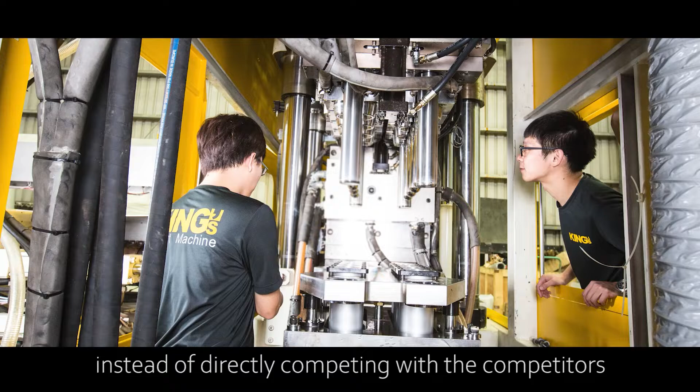From the beginning in 1983, we would face huge competition if we only made standard injection molding machines. However, instead of directly competing with the competitors, we prefer to work with our passions. Our founder, Mr. Bilsu, is a passionate engineer for machinery. He learned machinery from his professor in Germany, then worked in a Japanese company for years before he

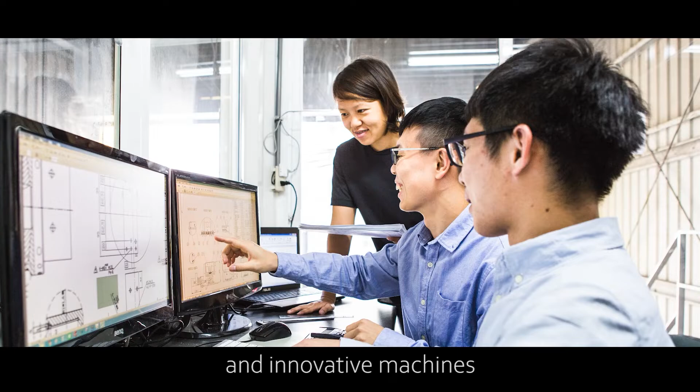set up this company. And he always encouraged our team to build customized and innovative machines to achieve the targets set by our customers. We are always excited to accept all kinds of challenges. Based on our experience over the years, we have provided successful solutions in many different applications, which continue to get us referrals to other new customers.

Regarding what you have mentioned, what are the customized machines that you have available to your customers? Oh, yeah, this is a very difficult question to answer. Actually, maybe I need to start from 1,000 sets of machines. For the past 40 years, we already developed so many different machines.

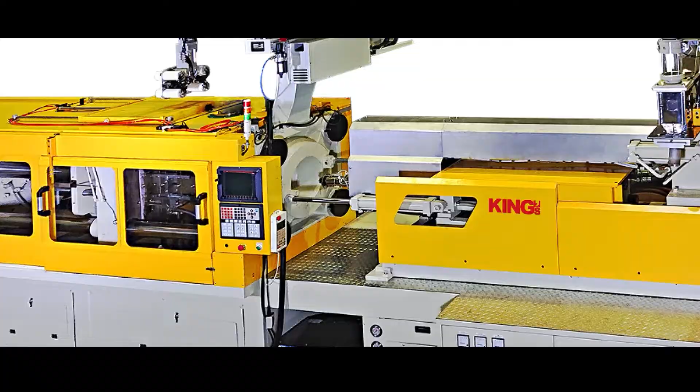However, in order to provide better service and also to meet the future trend, in 2000 we focused on 4 different series of our machines, including the vertical machine for insert molding with automation, the PET preform injection molding machine as a turnkey solution, a liquid silicone rubber machine for some special purposes, and also the low pressure molding machine, which is for the waterproof industry.

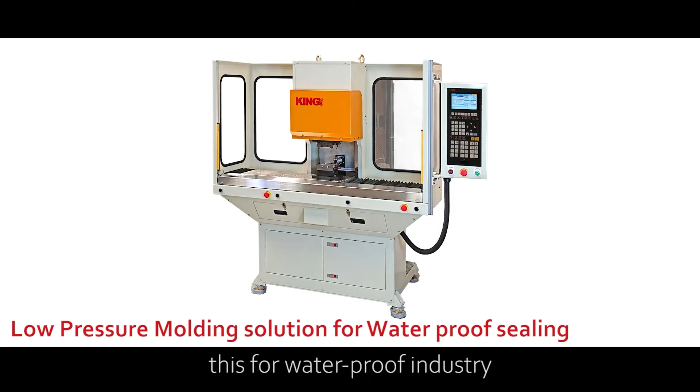So within these 40 years of expertise, what has been the biggest challenge you have had to face with a customer? And how did you make this challenge become one of your successful cases? I think staying ahead of customer needs is always the biggest challenge. You need to think ahead before customers think about it.

There is a very good experience. In 2015, we considered the huge portable drinking water consumption in developing countries. We developed the first 8-cavity 5-gallon preform molding machine. This is a very huge machine. The weight is over 22 tons. And the output is 3 times our previous model, and it saves 80% electricity.

After the hard work, we got the patent in Taiwan and China. We had a discussion with the biggest water and beverage company in the Philippines, where the electricity is twice as expensive as in Taiwan. We believed the new technology would be a green solution and contribute lean production for them.

However, the customer asked us to build a demo machine first to make 183,000 preforms for them for the trial to check the preform quality. If everything was fine, they would consider buying the next machine. So it took me only 2 days to accept the challenge, despite it being a huge investment for our company to prove the new idea.

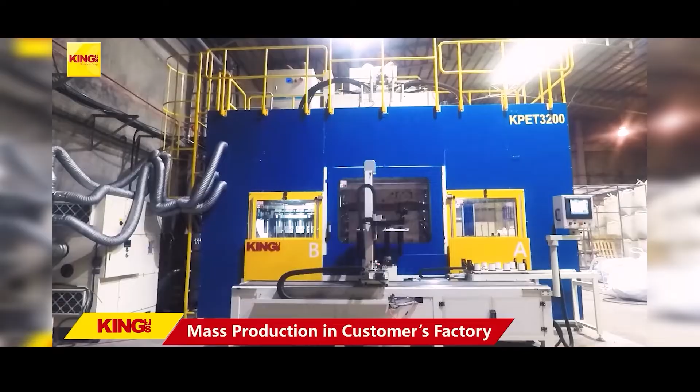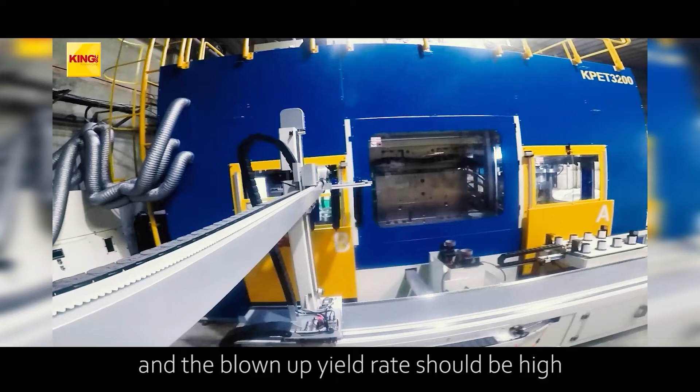Actually this preform is the biggest preform in the world for the water bottle. So it needs to be blown into a bottle. It's not the way you are looking at. A good preform has very little inner stress, and the blow-up yield rate should be very high. Our customer was buying preforms from other preform suppliers. The defective rate after blowing was about 3%. It means buying 100 preforms, they got 3 defective.

So let's see how was the performance of our preform. After 6 months of hard work, we delivered the preforms to our customer, and they were very satisfied with the result. The defective rate after blowing, how much do you guess? Maybe 0.8? Actually, it's only 0.1. Wow. Are you thirsty? Yes, I'm thirsty right now. Yeah, this is the result. That is more than 30 times improvement of the yield rate.

So the customer was very happy, and we received a purchase order for a new machine. It's been running 24 hours in our customer's factory. It saves them 80% of the power consumption. That equals more than $1 million of electricity over the past 3 years and reduces almost 2 million kg of carbon emission. So this is a win-win solution for King Solution, for our customer, and for the environment. That is the most important part.

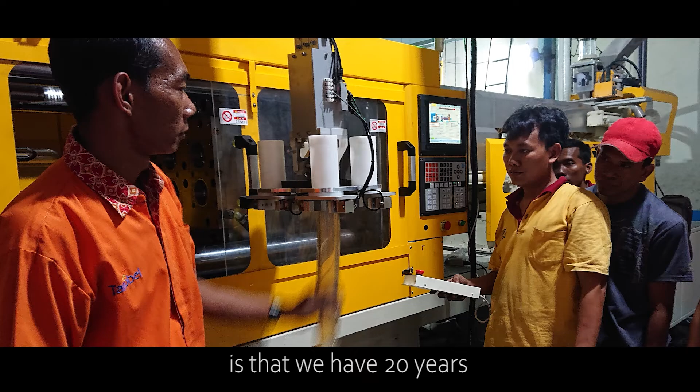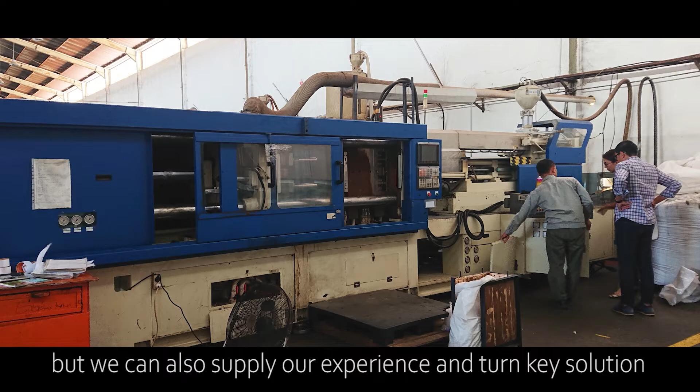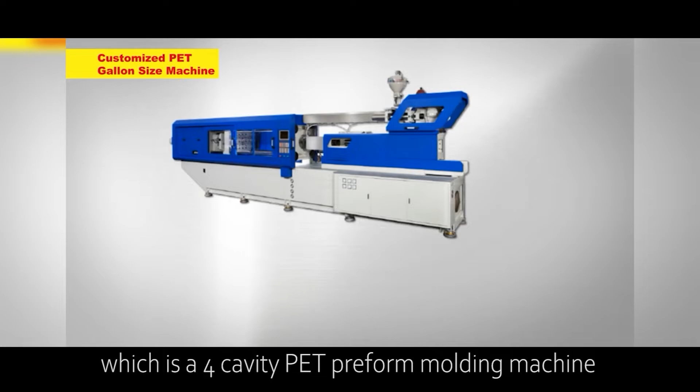Yeah, the main difference between King Solutions and other factories is that we have 20 years of preform molding experience ourselves. We are not only the hardware supplier; we can supply our experience, the full turnkey solution, and the ideas to the customer. So when we were developing the model KPET 1600, which is a 4 cavity PET preform molding machine, that was 20 years back.

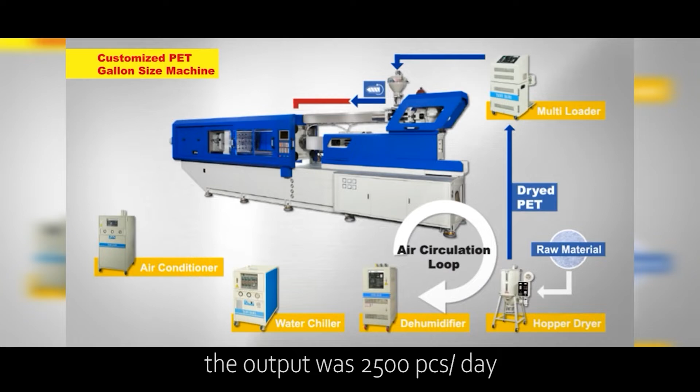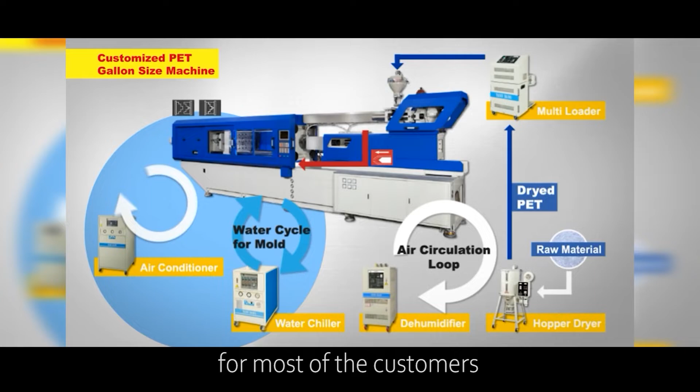Okay, the output was 2,500 pieces a day, but the customer requirement was quite low. So the output of this machine was too high for most customers. Then no one would buy our machine, because it was beyond their requirement. So we needed to sell the preform first. Okay, from 2,000, 5,000, 10,000, and all over the world. So we started to set up the production line and sell all over the world for the next 10 years.

And meanwhile, we kept improving our mold and machine design to reduce the power consumption. This is the most important. You know, injection molding is just material and electricity. So we reduced the power consumption and even supported the PET resin supplier to develop a customized material for thick wall PET. Because this preform is 700 grams, the thickness is almost 10 millimeters. That is very, very difficult to mold. Okay, so we required some special material, so we supported this supplier to develop it.

And we have the confidence to say that the standard of the highest quality 5-gallon PET preform was set by King's due to this project. So based on this complete value chain experience, our turnkey solution can support our customers to start the preform business from zero to mass production in their country within only 5 months delivery time. And the break-even time for the investment is 1.8 years.

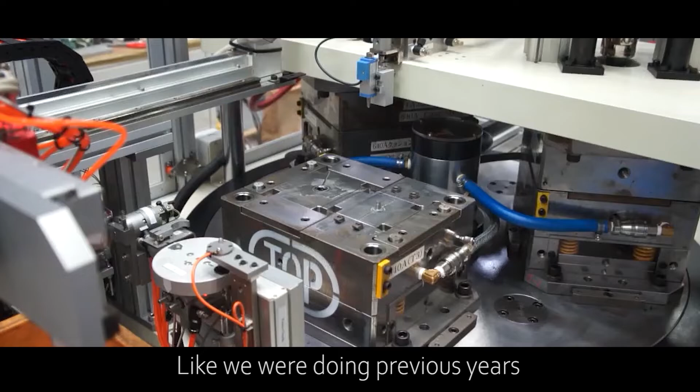No contact economy, for long distance medical care, remote learning, and remote work, like we have been doing for the previous months and years. Okay. And no people production: production automation, robotic warehousing and logistics. The third is no limit application: even more accurate medical care, artificial intelligence, and smart city and transportation. So in response to these trends, how to develop new technology in the shortest time with environmentally and socially friendly solutions is a key performance test for every company.

Since ESG, as I mentioned, is also a very important factor for international investors. So for the past 20 years, we have designed machines that produce eco-friendly products, such as returnable PET jugs, which are important packaging for clean water in developing countries or rural regions. Also, we have low-pressure waterproof molding solutions and liquid silicone rubber precision turnkey solutions for electronic parts for various industries, such as medical care, smart city, transportation like EVs, 5G, etc. All these solutions are energy saving and automated for Industry 4.0 and lean production.

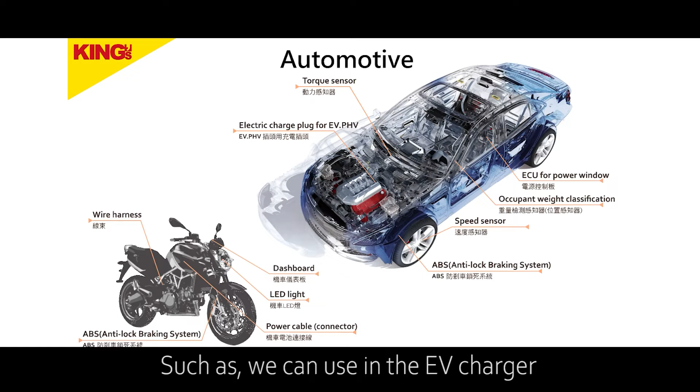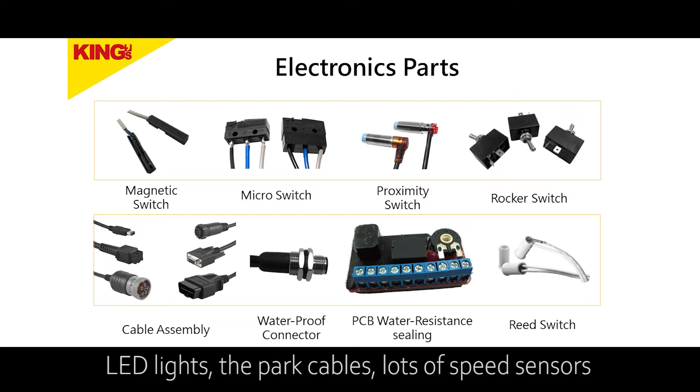So for automotive applications, we have different ideas, such as the e-vehicle charger. There are a lot of wire harnesses, even the ABS sensor, you know, the scooter ABS sensors, the water sealing of the dashboard, the LED light, the power cable, and a lot of speed sensors and tire pressure sensors. So today I also brought some samples here. Amazing. Yeah.

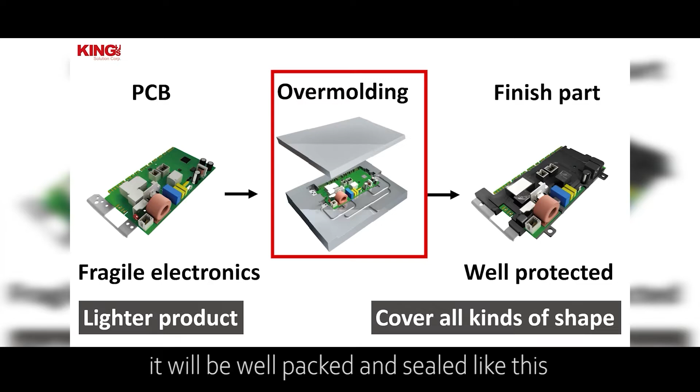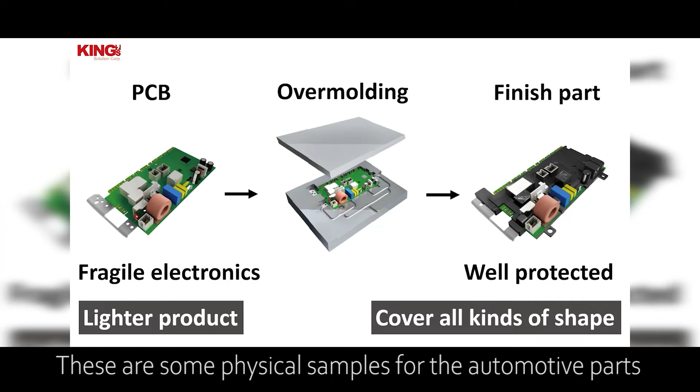So these are some physical samples for the automotive part. And for the electronic parts, there are more applications. So now we know that Industry 4.0 is very important. For the smart city or for automation production, we require a lot of sensors and switches. There is magnetic switch, micro switch, proximity switch, rocker switch, cable assembly, waterproof connector, PCB resistance, water resistance, or some different cameras. All of these applications are for the smart city.

And here I also have some samples to show you. This is a very interesting sample. You know, this is for satellite. Satellites? Yeah, this is for satellite. This is from one of my customers. They are in the very north country. So usually they have this cable, the length is over 50 meters, 100 meters. And after some time, the connector will be damaged.

So they will overmold again with low pressure molding. Every cable is very expensive, so they don't want to waste the cable. But when they are doing the overmolding, they need to ensure the quality is good and can last for a longer time. So this is before molding. Before molding. That is after molding. Yeah, that is after molding.

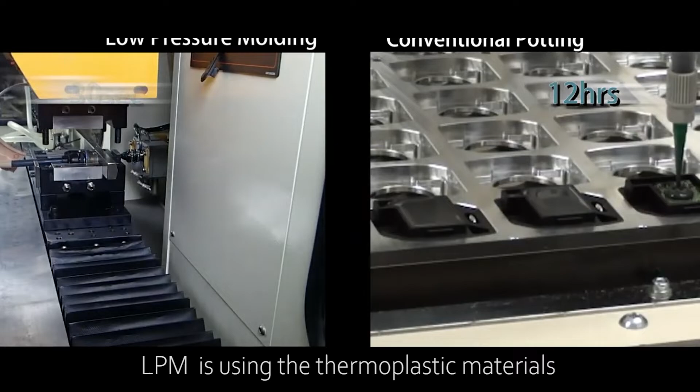We can compare with the conventional injection molding material. The traditional injection molding machine requires very high processing temperature and pressure, and it would damage the printed circuit board. The low pressure molding uses thermoplastic material, which is from a special natural adhesive. It has very, very low viscosity, allowing us to overmold and encapsulate even the most sensitive circuit board and tiny cable assembly.

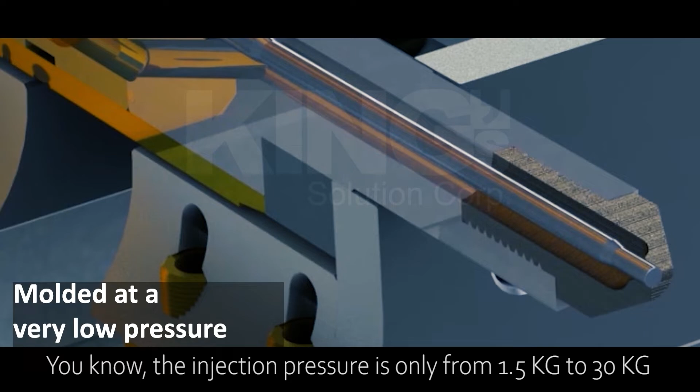You know, the injection pressure is only from 1.5 kg to 30, but the standard conventional injection molding machine is about 300 to 500 kg. That is way different between the low pressure and the conventional pressure overmolding machine. And because the material is natural adhesive, the process is well suited for sealing the circuitry against dirt, dust, and moisture. In many cases, it's up to an IP68 rating.

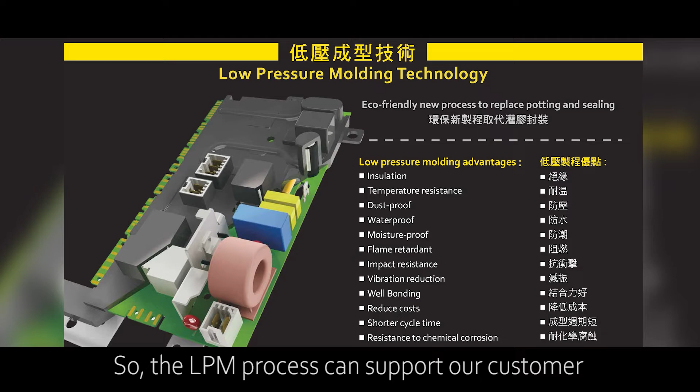So the low pressure molding process can support our customers to develop innovative electronic parts easily and efficiently, with a higher yield rate than the conventional process. In addition, the traditional potting process comes from A and B two components mixed together. That is the chemistry part, it's not thermal molding. So it requires curing time for many hours with UV light or an oven, and some of the compounds contain BPA,

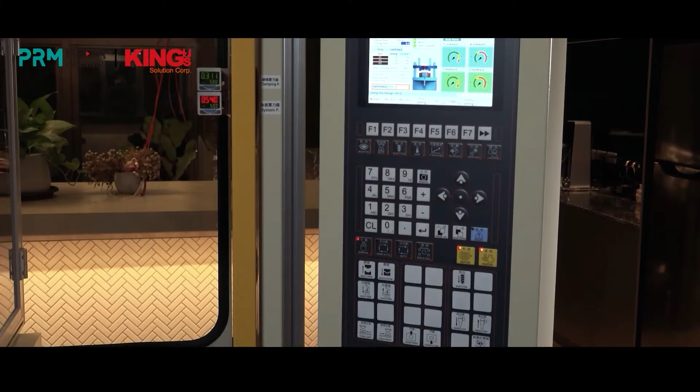which is very harmful for the operators. So LPM requires just 30 to 60 seconds, and the material is environmentally friendly. The machine parameters can be easily set, and the molding result is fast. So this is also the key benefit that creates an efficient and comfortable working experience for our customers and for the employees. Wow, yeah. Really nice to hear that.

Now, talking a little bit about the global situation, what have been the biggest challenges that you have had to face in terms of communication, logistics, and customer service?

Yeah, it's been over one year since my last travel to other countries because of COVID. Everyone was trying to adapt to the new work and lifestyle, and trying to keep the economy active in a safe way. So logistics is also a headache issue. I have a lot of machines that cannot be delivered lately. Yeah, we all face the shortage of shipping containers and unpredictable shipping schedules. But there is really nothing we can do. What we can do is be patient.

So during the waiting time, we are just trying to give better service to our customers. New machine installation and training is a big problem when we can't be there to support the customer in person as before. So in order to support our agents and customers, we have made over 30 videos this year for different machines, with detailed maintenance guides and machine installation and operation, covering the mechanism, hardware and software. All the videos are detailed, and we share them with our customers to guide them on how to install and solve problems by themselves.

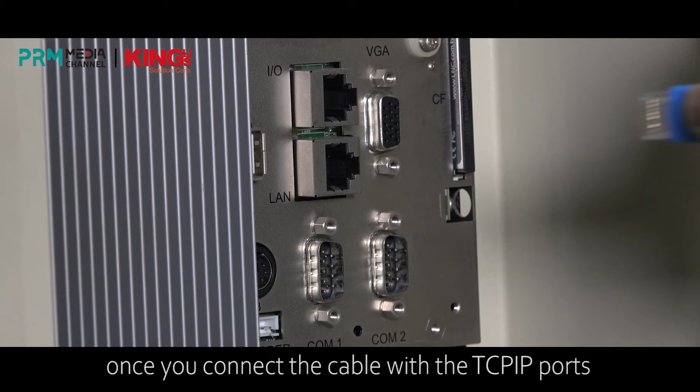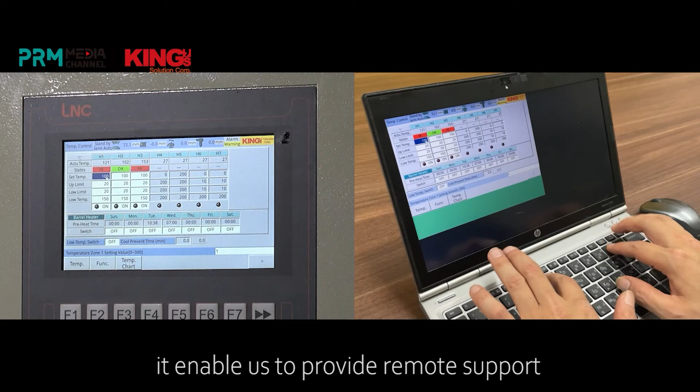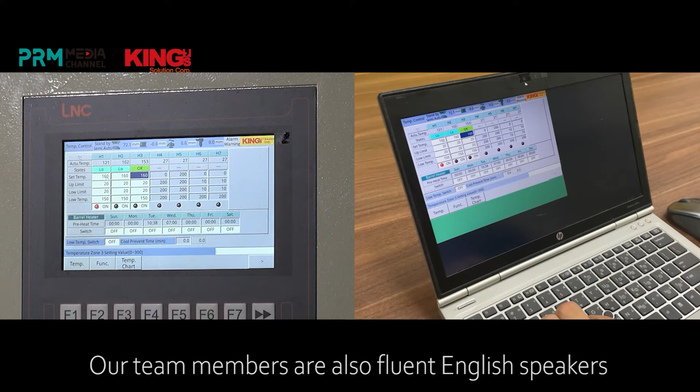Furthermore, all series of King's machines are installed with an industrial PC controller. It's just like everybody's laptop, a PC. Once you connect the cable to the TCP/IP ports, or you can even use Wi-Fi, it enables us to provide remote support and machine service directly from Taiwan to all our machines around the world. Our team members are also fluent English speakers, so we can give our customers very strong support with the online service.

Wow, I have this feeling that despite the pandemic, you still have no obstacles. You still have advances in technology, and you still have the flexibility to adapt to this new situation. So, despite this pandemic, what positive message could you give to your potential customers seeing you right now?

Yes, actually, I really would love to visit all the customers face to face. However, we are trying our best to meet customers in different ways. For the past few years, we already joined several international exhibitions and conferences, especially in North America, Mexico, Indonesia, India. Fortunately, in the past year we have found some strong partners as our official service agents, and they can support the customer with the best service based on our support.